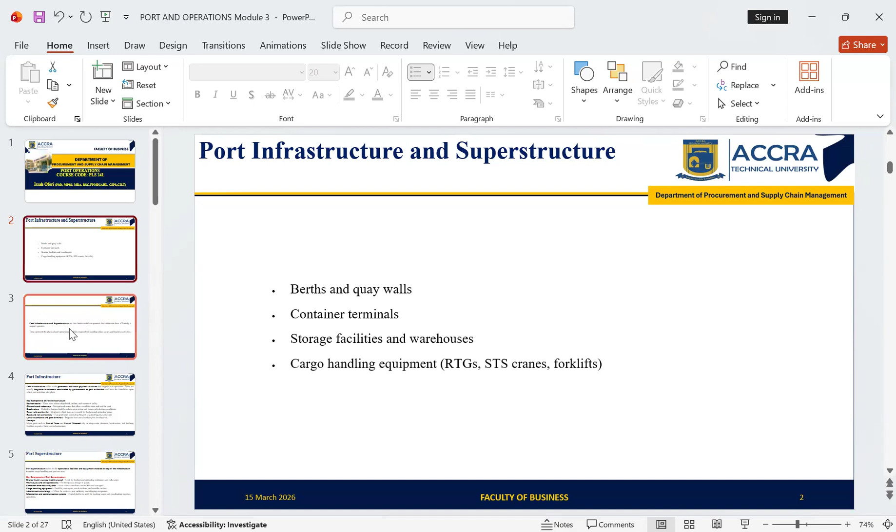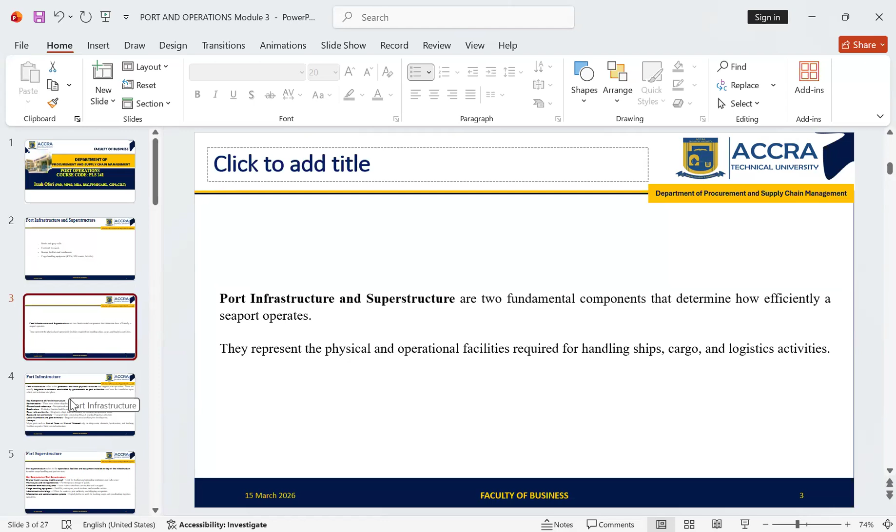Okay, so the infrastructure and the superstructure are the two fundamental components determining how efficiently a seaport operates. They represent the physical and operational facilities required for handling ships, cargo, and logistics activities. Let us now look at the port infrastructure, then the port superstructure. Port infrastructure refers to the permanent and basic physical structures supporting port operations. These are usually long-term investments constructed by government or the port authorities, and they form the foundation upon which port activities take place.

The key components of port infrastructure: one is the harbor basins, the water areas where ships berth, anchor, and maneuver safely. We have the channels and waterways. We have the breakwaters. We have the quay walls and berths. We have the road and rail connections, land reclamation and port terminals. So these are the port infrastructure we are talking about. Then we look at the port

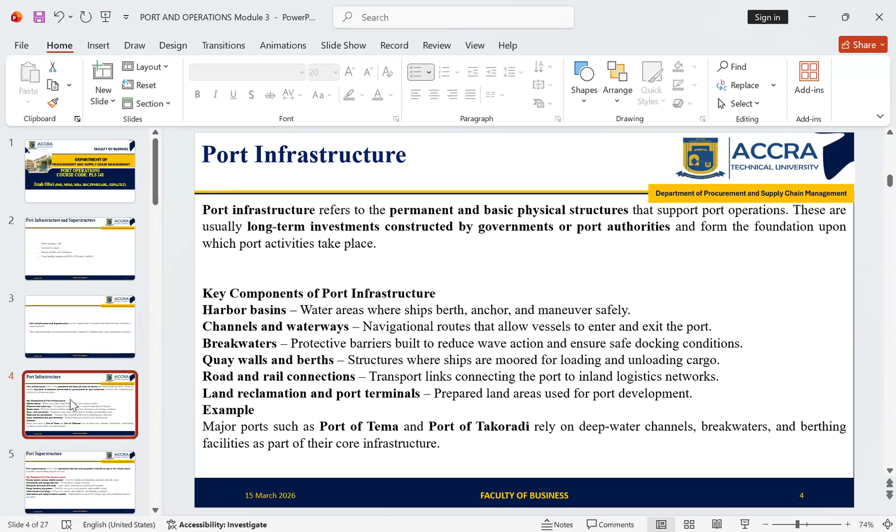superstructure. The superstructure refers to the operational facilities and equipment installed on top of the infrastructure to enable cargo handling and port services. Its key components are cranes, warehouses and storage facilities, container terminals, yards, cargo handling equipment, administrative buildings, and information and communication systems. Cranes, like gantry cranes and mobile cranes, are used for loading and unloading containers and bulk cargo. Warehouses and storage facilities are for temporary storage of goods. Container terminals and yards are where containers are stored and managed.

Then we have the cargo handling equipment, like the forklifts, the conveyors, the reach stackers, and the straddle carriers. Then we have administrative buildings, where we have the offices for customs, the port authority, and the shipping companies.

And then we also have digital platforms used for tracking cargo and coordinating logistics. That is the information and communication systems that we have. So that is the port's infrastructure and then the port's superstructure for us.

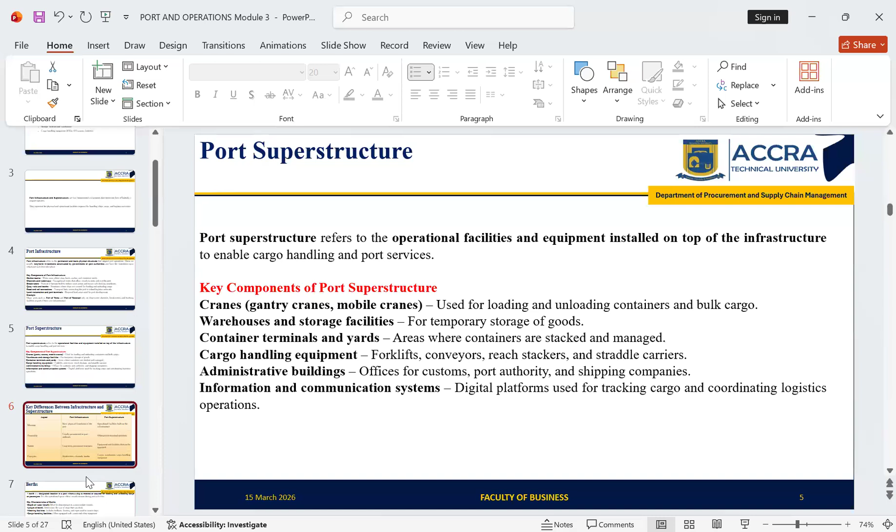So when we look at the key differences between the infrastructure and the superstructure, in terms of meaning, the port infrastructure refers to the basic physical foundation of the port, but the port superstructure is the operational facilities built on the infrastructure. In terms of ownership, usually the government or port authority owns the port infrastructure, and the superstructure is often owned by private terminal operators.

When we look at the nature, the port infrastructure consists of long-term and permanent structures, but the port superstructure, equipment and facilities, can be upgraded. So when we have cranes or a forklift and we think they are no longer efficient or they are outmoded, we need to bring in new ones. So we can just upgrade, and the latest versions will help us work very well.

So for the infrastructure, we may have the breakwaters as an example, the channels, and then the berths. But the port superstructure covers the cranes, warehouses, cargo handling equipment, and all that. Yes, so that's it. Any question, or we can continue?

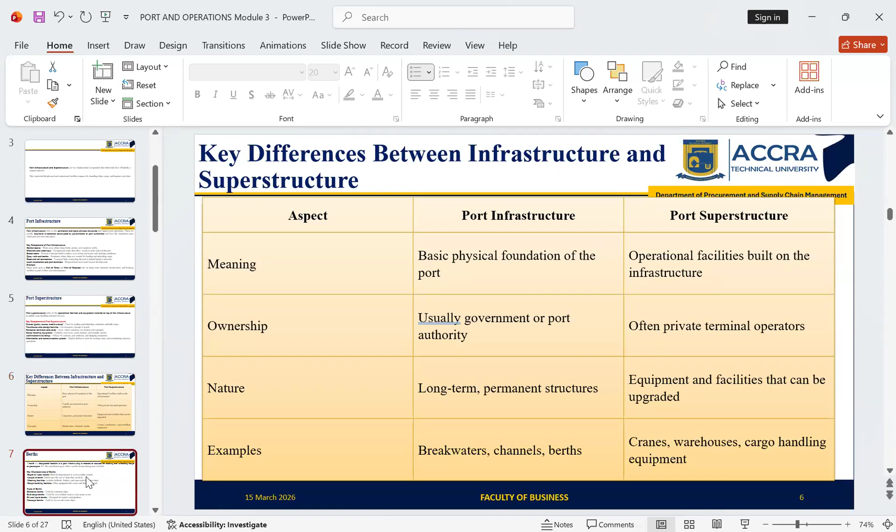All right, thank you. So a berth is a designated location in a port where a ship is moored or secured for loading and unloading cargo or passengers. It is the operational space where vessels remain during port water activities. The key characteristics of the berth include the depth of water, that is the draft, and the length of the berth, which determines the size of the ships that can dock.

Then the mooring facilities include the bollards, fenders, and ropes used to secure the ships. And the cargo handling facilities are often equipped with cranes and other equipment. For the types, we have the container, bulk cargo, oil and liquid, and passenger berths as well. Okay, so then we have the quay walls.

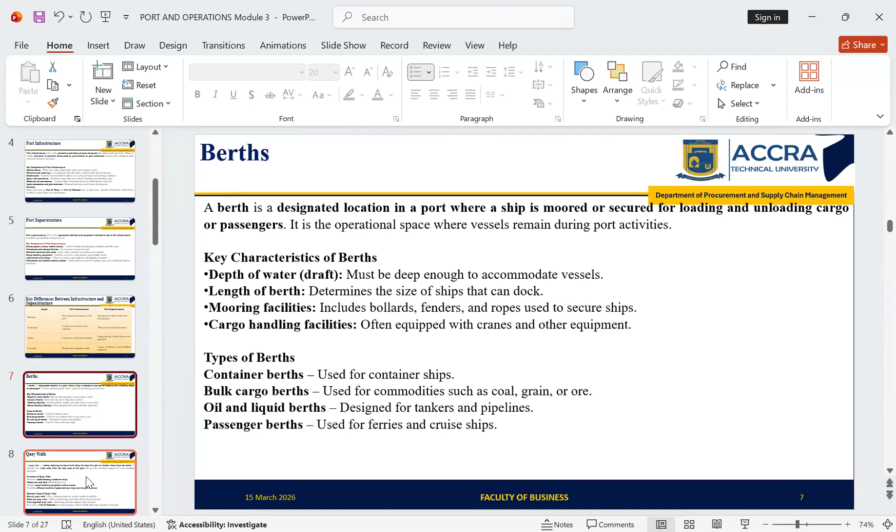This is a strong retaining structure built along the edge of a port or harbor where ships can berth. It separates the water area from the land area of the port and provides structural support for cargo handling operations. Its functions are providing a stable docking surface for ships, retaining soil and land behind the port area, supporting cargo handling equipment such as cranes, and facilitating efficient transfer of goods between the ships and the port terminal.

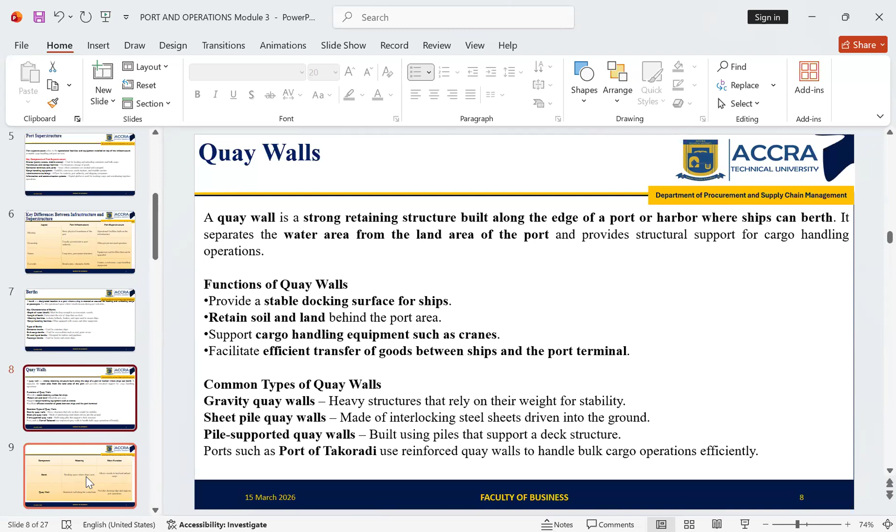The common types are gravity quay walls, sheet pile quay walls, and pile-supported quay walls. When we check ports like Takoradi, they all have them for bulk cargo operations, for efficiency's sake.

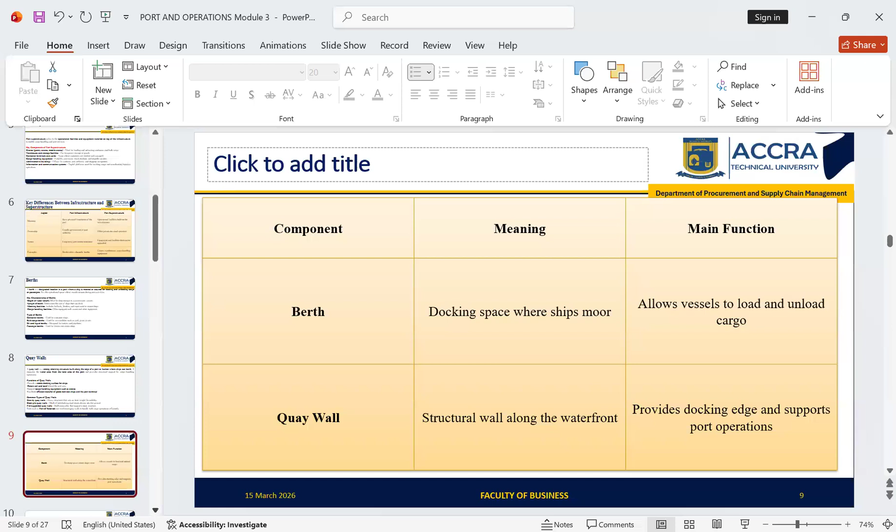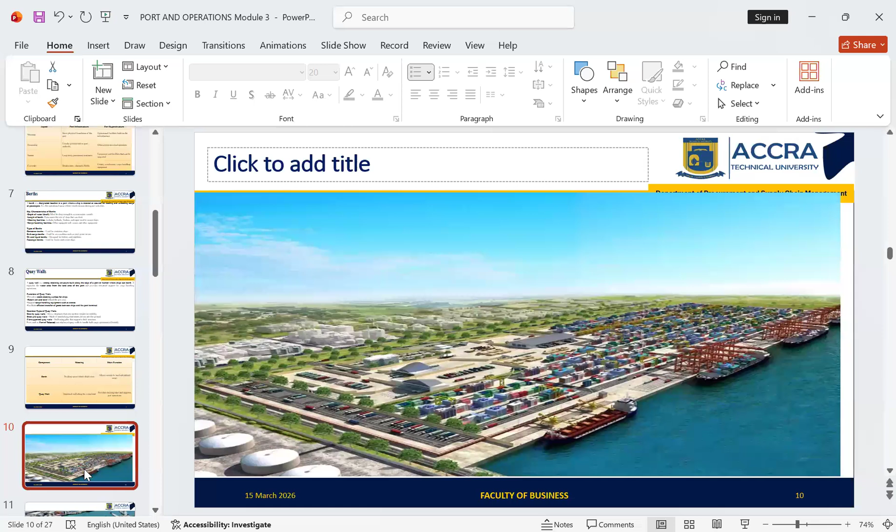Okay. So when we look at the picture over here, we can see how they've designed the port. We see the walls, and we also see the berths that they have created. Yes. Okay, so I think this one too can help us see it very well.

Okay, so we look at the container terminals. A container terminal is a specialized facility within a port designed for the handling, storage, and transfer of containerized cargo between ships, trucks, and railway systems. So the terminal is designed for the handling, storage, and transfer of containerized cargo between ships, trucks, and the rail system.

It plays a central role in modern maritime trade by ensuring the efficient movement of standardized containers across the global supply chain. Container terminals are common in major seaports such as the Port of Tema, which serves as Ghana's main hub for containerized cargo and international shipping.

So we will consider the main components of a container terminal. When we look at the main components of a container terminal, we have the berths. These are the docking spaces where container ships are moored for loading and unloading operations. They are usually equipped with ship-to-shore cranes. And then we have the quay cranes, which serve as ship-to-shore cranes. They are the large cranes installed along the quay walls used to lift containers from ships to the terminal or from the terminal onto ships.

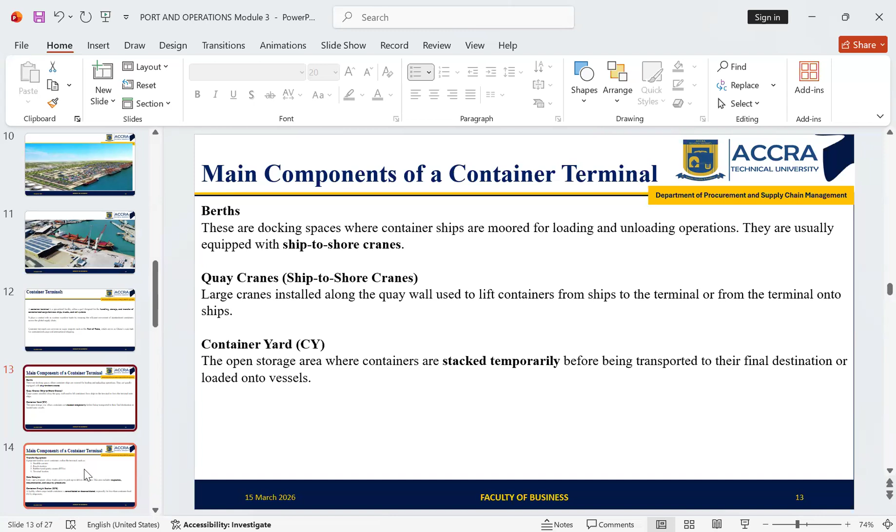Then we have the container yard. It is an open storage area where containers are stored temporarily before being transported to their final destination or loaded onto vessels. So the first main components of a container terminal are the berths, the quay cranes, the container yards, and then we also have the transfer equipment. These are used to move containers within the terminal, such as straddle carriers, reach stackers, rubber-tyred gantry cranes, and terminal tractors.

Sorry, a minute, let me. Yes, I'm in the office. Okay, so please check the room for me. F2. Okay, thank you. All right, sorry. They are writing my paper and I need to go and invigilate it at 2 o'clock. So quickly, let me finish it up with you so that I can also attend to them.

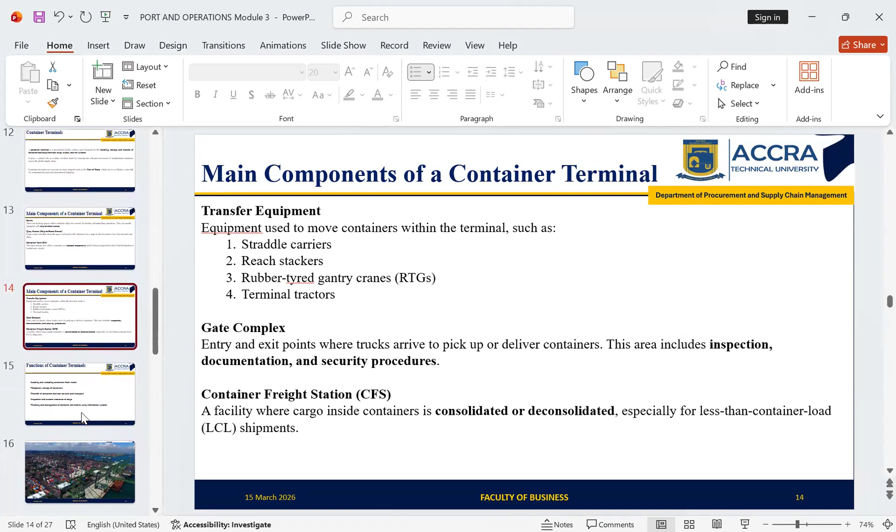All right, so then we have the gate complex and the container freight stations. These are the main components of a container terminal. Then we can look at the functions of a container terminal. One, loading and unloading containers from the vessels. Two, it serves as temporary storage of containers. Three, transfer of containers between sea and land transport. Four, inspection and customs clearance of cargo. And five, tracking and management of container movements using information systems.

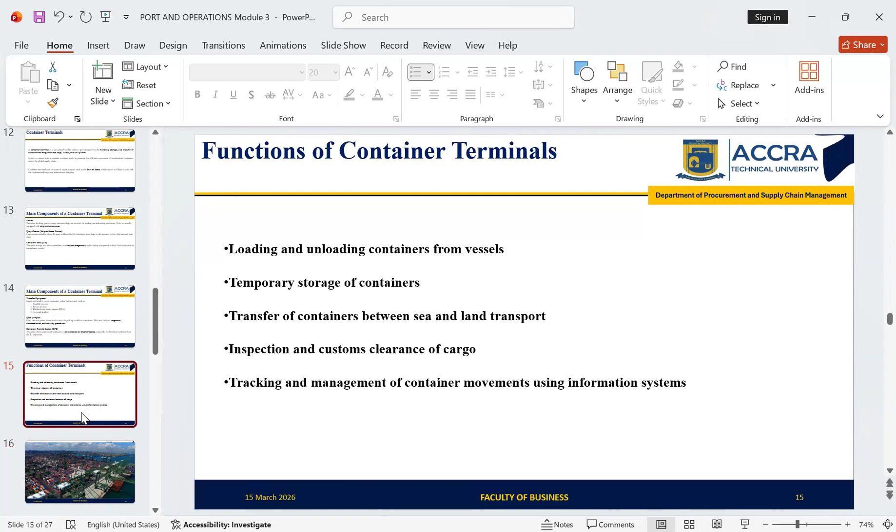This is Randolph. Please, I want to know: let's say I've ordered things from China or any part of the world, and it has come to Tema Port in a container, only my goods, either a 40-foot or 20-foot container. When I go to take my goods, would they give me the container, or if a truck brings it to me with the container, are they going to return the container back?

It depends on your terms and conditions with the supplier. We were working with some suppliers in China, and when they brought the container to us, it could be in our yard for a maximum of 2 weeks. After 2 weeks, if we failed to return it, we would start paying for it. There could also be an arrangement if you need that container, so you have to arrange with the supplier, and in terms of billing, they may consider selling that container to you. But if they are just bringing the container for you to offload your items at your premises, you have to remove your things and give the container back so they take it to the supplier. So it depends on the arrangement you have with your supplier.

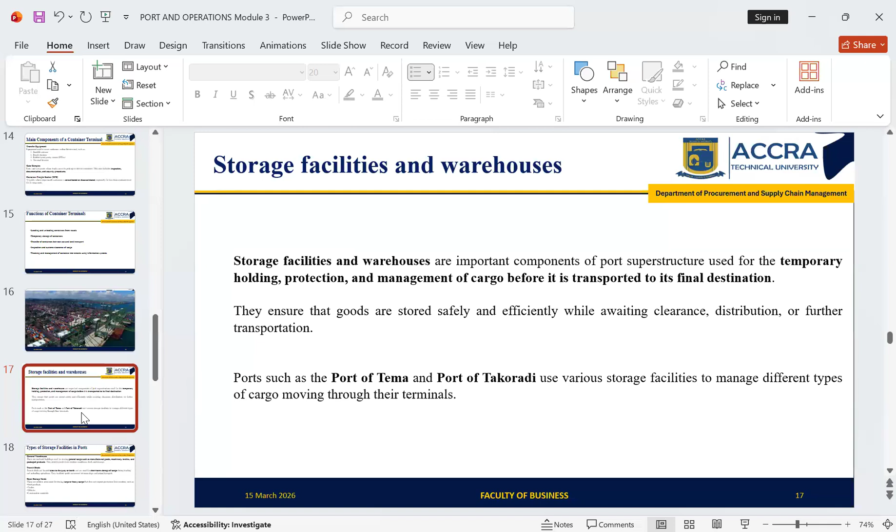So when we look at Tema and Takoradi ports, they use various storage facilities to manage different types of cargo moving through their terminals. So we look at the types of storage facilities in ports. First, we have the general warehouses. These are enclosed buildings used for storing general cargo such as manufactured goods, machinery, textiles, and packaged products. They protect goods from weather conditions, theft, and damage.

And then we have the transit sheds. Transit sheds are located close to the quay or berth and are used for short-term storage of cargo during loading and unloading operations. They facilitate quick movement between ships and inland transport. And then we have the open storage yards. These are outdoor areas used for storing large or heavy cargo that does not require protection from weather, such as steel products, timber, vehicles, and construction materials.

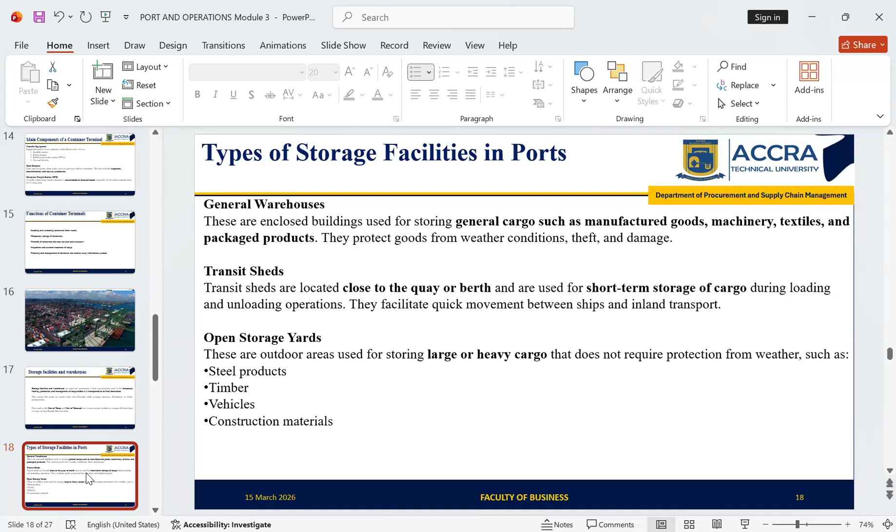We also have container yards. These are specialized areas where containers are stacked and stored temporarily before delivery to customers or loading onto vessels. And then we have specialized storage facilities. Some ports provide specialized storage for specific cargo types, such as cold storage warehouses for perishable goods like fish, fruits, and pharmaceuticals, tank farms for liquid cargo such as petroleum and chemicals, and bonded warehouses where imported goods are stored before customs duties are paid.

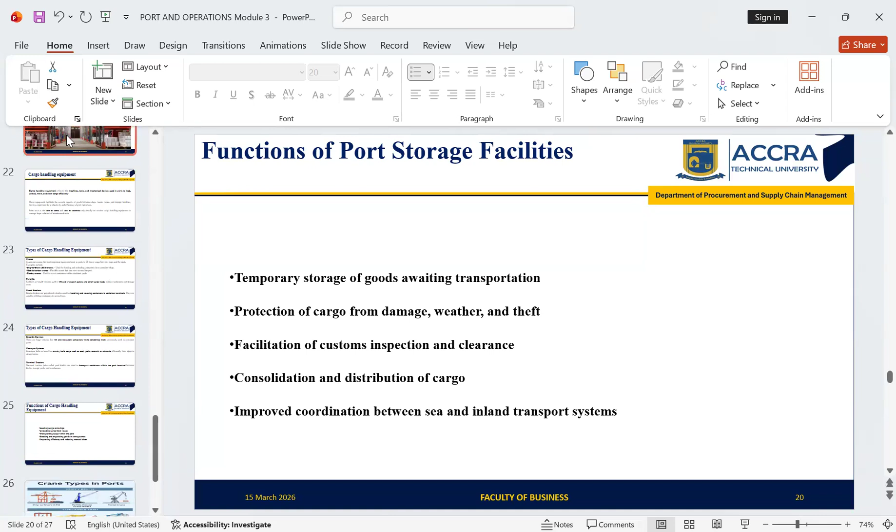Okay, so quickly we look at the functions of port storage facilities. One is temporary storage of goods awaiting transportation. Two, protection of cargo from damage, weather, and theft. Three, facilitation of customs inspection and clearance. Four is consolidation and distribution of cargo. And five is to improve coordination between sea and inland transport. So we see an example of a storage facility. Yes, a warehouse storage facility for ports.

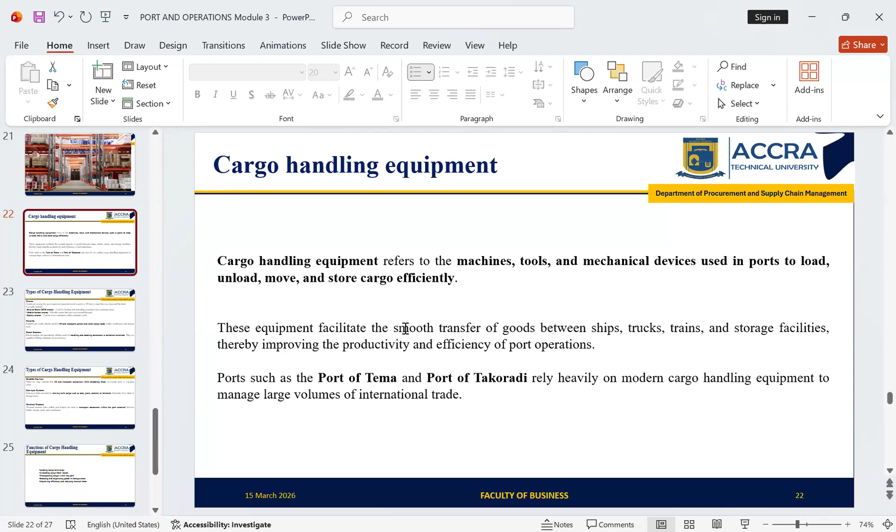Okay, so cargo handling equipment refers to the machines, tools, and mechanical devices used in port to load, unload, move, and store cargo efficiently. This equipment facilitates the smooth transfer of goods between ships, trucks, trains, and storage facilities, thereby improving the productivity and efficiency of port operations. Tema and Takoradi ports rely heavily on modern cargo handling equipment to manage large volumes of international trade. So we look at the types of cargo handling equipment.

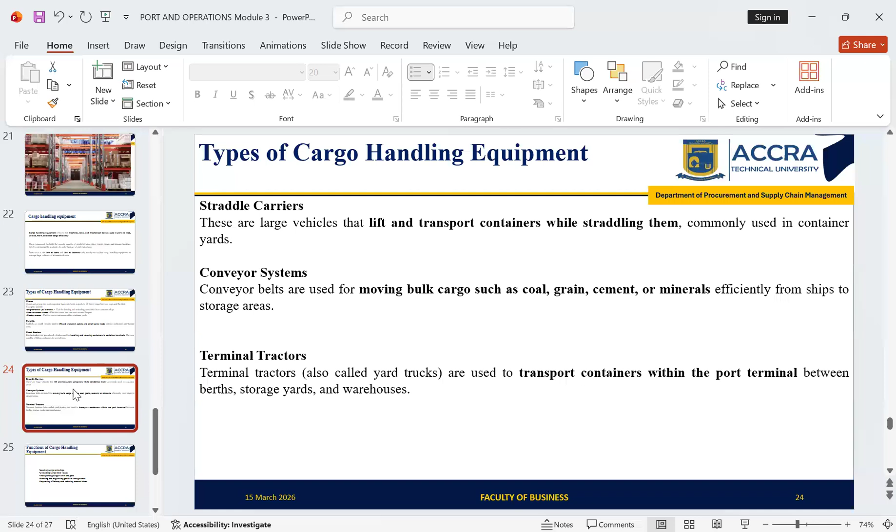So we've treated port infrastructure and superstructure, where we were saying that they are the two fundamental components determining how efficiently a seaport operates.

So the port infrastructure, we discussed it very well by saying that it is a permanent and basic structure that supports port operations, and then the port superstructure is looking at the operational facilities and the requirement, that is, the equipment that is installed on top of the infrastructure to handle and help the ports to be able to handle the cargo and other port services.

So we considered the infrastructure, the berths that we have to have, the walls that we need to build, and then also the superstructure. We considered the container terminals, the main components of container terminals, the functions of container terminals, then the storage facilities and warehouses, types of storage facilities in ports, functions of port storage facilities, types of cargo handling equipment, and the functions of cargo handling equipment.